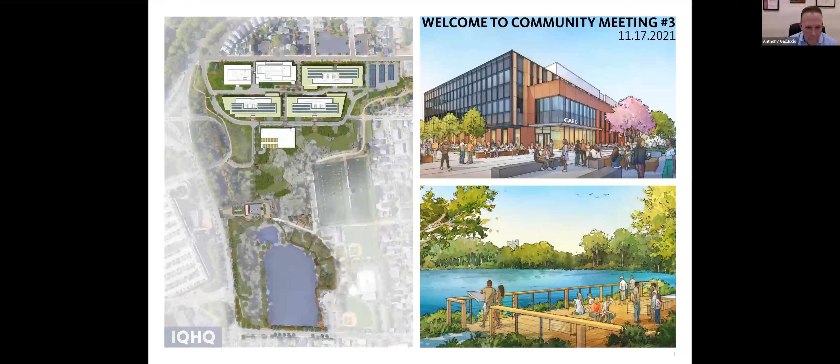This is our agenda for tonight. We're going to go through the different aspects of the Article 19 process, so that when we get to that part of the public process, you folks are in those lanes. I won't read through all of these, but they include zoning conformity, site connectivity, parking, traffic, stormwater, environmental, landscape and trees, sustainability and resiliency.

We also want to give you a sense of the construction timeline. This has probably been the most interactive process I've ever been involved in for a project that wasn't seeking new zoning, and we're going to continue this. So don't worry if there's any site mobilization or moving around - we're going to be communicating with you. Our team has great construction experience and we're all very vested with the neighborhood.

We'll give you a sense of that at the end. The presentation is about 50 minutes. It's comprehensive, but we'll leave about an hour for questions and answers. You can chat, but we're probably not going to grab questions as we go unless we're really fluid - we'll save them for the end and track them. We'd love for you to stay on to hear the answers, but if you have to leave, put your question in the chat and we'll track it and make sure we answer it.

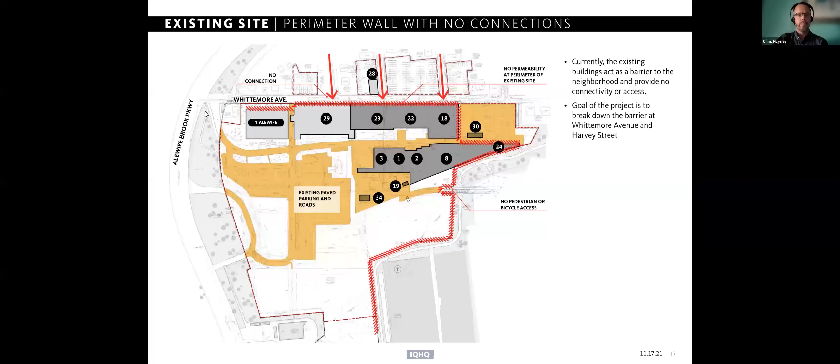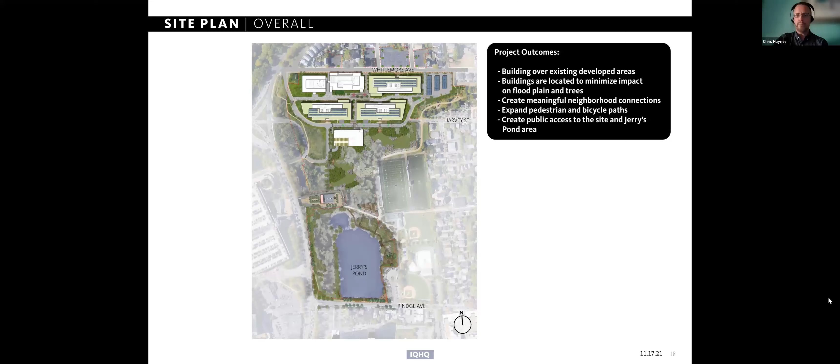This slide includes the overall proposed site plan from Whittemore all the way north to Rindge Ave to the south. This includes the Jerry's Pond Public Access Plan and the development area to the north. On the right side, we've included 5 of the main design principles for the project that were developed based on input specifically from the community.

One by one, the first being building over existing developed areas. You'll see that all of the new buildings, which are in the northern part of the site, are to be developed over existing buildings or existing paved areas. So that's the first design principle.

The second is to locate them in those northern areas to minimize the impact on floodplain, and Howard Moser from VHB will talk a little more in detail about that. In addition, minimize impact on trees.

The third main design principle is create meaningful neighborhood connections. The fourth is expanding pedestrian and bicycle paths. And the last is creating public access to the site and also to the Jerry's Pond area to the south.

The two buildings in the upper left corner are buildings 1 and 2, our existing buildings to remain—they're shown in white on the plan. To the east and south are 3 new proposed buildings, and the smallest footprint building to the south is the proposed parking structure.

All new construction is being proposed under current zoning, as Anthony outlined in the zoning section. New buildings are energy efficient and include biosolar roof installations, and there'll be more on that in the sustainability section.

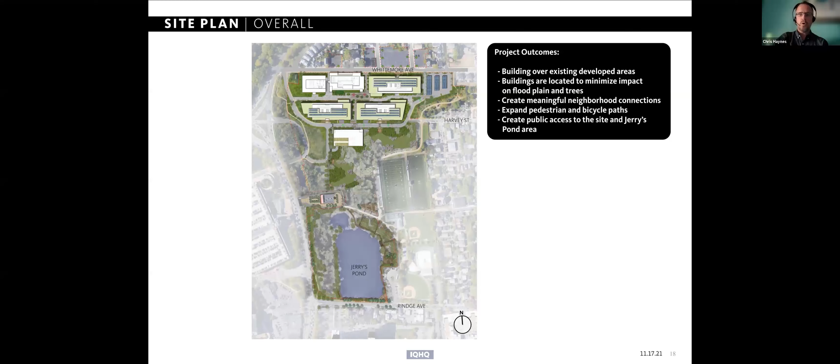The current noise levels were measured and compared against the modeled sound levels from the new buildings, and the new development sound levels will be lower than the current measured noise level—so an overall improvement to the neighborhood.

On the next slide, we'll talk a little bit about the connections that were one of the design principles of the project. There are 6 major connections on this slide that connect the 3 neighborhoods: Whittemore, Harvey Street, and Rindge Ave. These are all really important connections, based on what we heard from the neighborhood groups in previous community meetings. Starting at the top, the Whittemore neighborhood noted 2 main connections.

One is the Whittemore Gateway, in the center of Whittemore Avenue, which links the neighborhood to the north toward the south, to the garage and the MBTA head house and point south. The second, in the upper right corner, is a connection to the Whittemore linear path. The neighborhood noted this was a really important connection. We heard you, and we created that multimodal path, which also includes a new blue bike station for easy access to the linear path.

Next is the Harvey Street connection on the right side. Currently there's no access at Harvey Street, and we heard 2 important points regarding this connection: number one, it should be for pedestrian and bikes only, and number two, there should be no vehicle access.

So no neighborhood cut-throughs—there will only be emergency vehicles at Harvey Street. And then the 4th connection is at the MBTA head house in the center of the drawing.

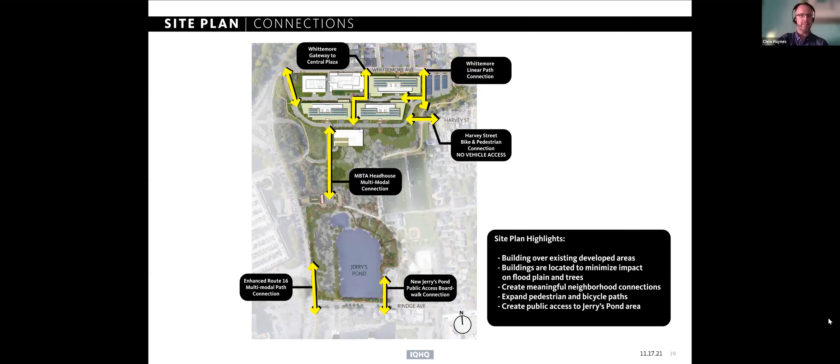So the next slide zooms in a bit on the northern part of the site. Here you see the Whittemore connections to the Central Plaza, as well as the linear path connection on the right side of the plan—bike and pedestrian lanes. These are all publicly accessible connections to and through the site.

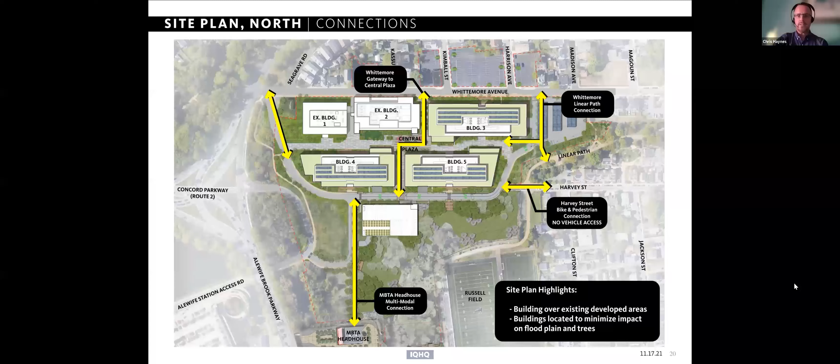You'll also note at the top part of the plan, the Whittemore parking lots are to remain and will be enhanced with trees and other improvements recommended by the neighbors—more on this a little later. So the next slide shows the network of connections and paths through the site.

This was one of the main design principles for the project: expanding bike and pedestrian paths. We heard that from the community early on, to create more space for bikes and pedestrians, and that was critical to the success of the project.

As you can see from this diagram, extensive bike and pedestrian paths have been added to expand the bike and pedestrian accommodations. Community input was vital to provide the most useful and safest connections through the site.

Through the Alewife study group process, specifically with Mike Nakagawa's collaboration, it was integral in helping define a west-to-east path through the site that connects folks with the bike accommodations to the west and the Minuteman path through the site and then to points east.

And this will help alleviate the current congestion that's happening east of the path for those folks who are bike commuting through the site and toward points east.

And then to the south, you can see a robust network of paths in the Jerry's Pond area. Again, there'll be more detail on that in later parts of the presentation.

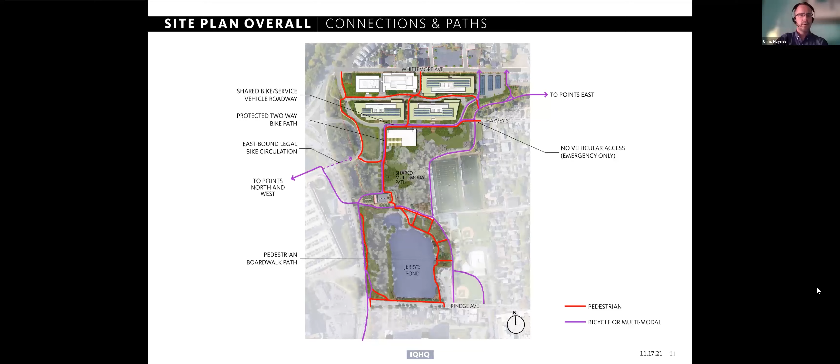So on the next slide, we'll zoom in a bit on the northern part of the site, and I'll draw your attention to a couple of things.

One is the purple line I was just mentioning on the left side. That does connect down south through the site to points east, and again, that will alleviate congestion that we've heard from the community exists east of the head house, by creating this alternate path for through bikes traveling in the west to east direction.

Also just highlight the Whittemore connections, both pedestrian and the multimodal path. In addition, wanted to note that on the west side of the site, you can see a dashed line that goes through the tunnel underneath Route 16.

So we did hear from the community that they were interested in that as potential connectivity. We did do some analysis of that, and based on some dimensional challenges, we're unable to provide two-way dedicated bike and pedestrian access as well as the required dimensions for emergency vehicles such as a fire truck.

But we do know that eastbound legal bike circulation will occur there, and then it can connect into the network of paths created on the site. All right, next slide.

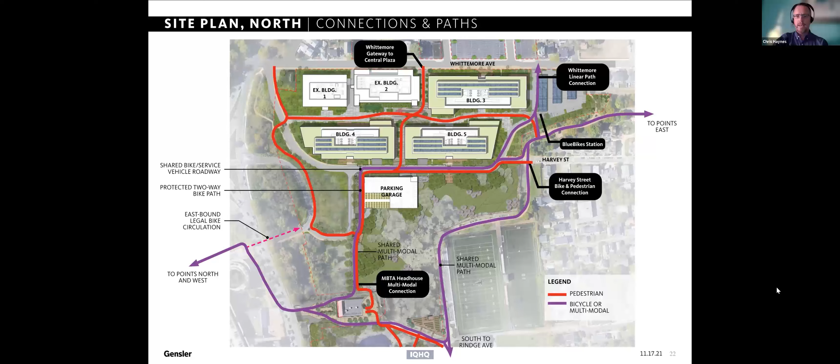So in addition to creating connections, the project is also creating destinations. Based on community feedback and great ideas from folks like David Bass and others, the Central Plaza was designed to accommodate food trucks, lots of seating, a temporary performance area, as well as retail, and all of these areas will be publicly accessible.

To the south, there are overlooks and seating within the habitat areas and Jerry's Pond, and there'll be more on that from the landscape architect.

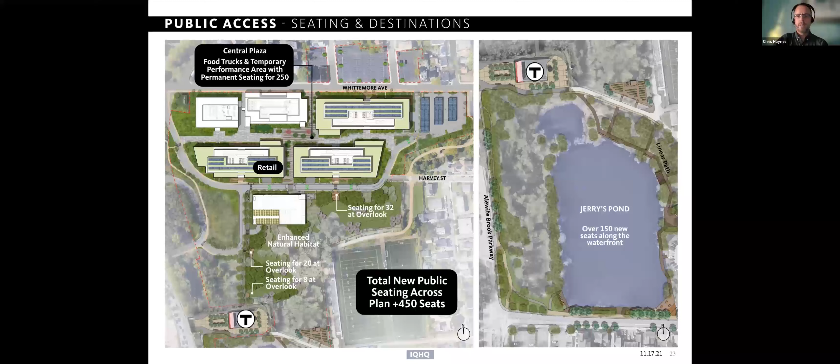So next, we'll do a bit of a walking tour through the site, just to show you a few views of the new buildings and views from around the neighborhood.

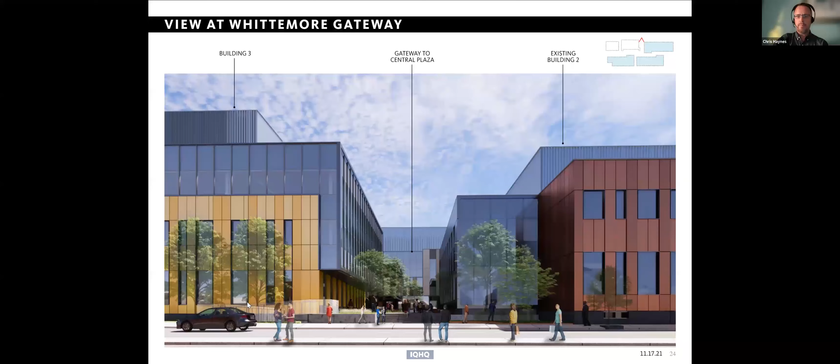So this first one is what we call the Whittemore Gateway. This is looking south from Whittemore. This is the permeability, this is the connection through the site. You'll notice that with the building setbacks, there's space for trees and for a landscape buffer between the neighborhood and buildings.

The next slide is closer to the Harrison Avenue area. Again, you can see the setback allows for a landscape buffer between the buildings. We've scaled the buildings - they are 3-story under the current zoning, as Anthony mentioned - and created massing moves to break down the overall building length.

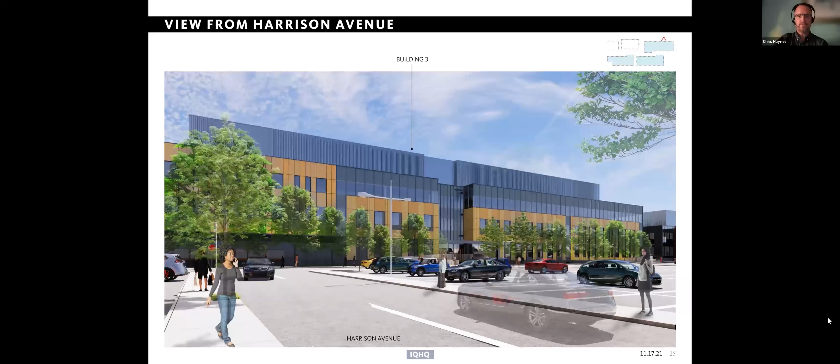In the next view, you'll see the Central Plaza, with activity from the food trucks, and the scale of the buildings as they step down to 3- and 2-story.

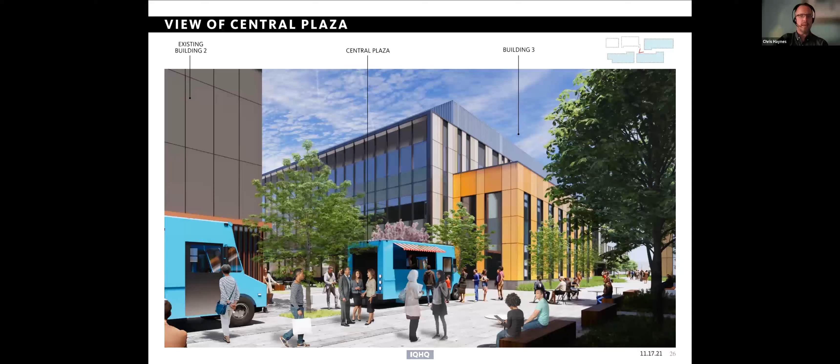In the next slide, this is the shared roadway within the site. It's shared between service vehicles and cyclists - this is not normal vehicular traffic, only service vehicles or emergencies. So it's mostly used by cyclists, with pedestrian sidewalks on the side.

You can see the overlooks on the right side that overlook into the natural habitat area, and in the distance is Harvey Street, just to orient everyone. You can also see the scale of the residential buildings in the background.

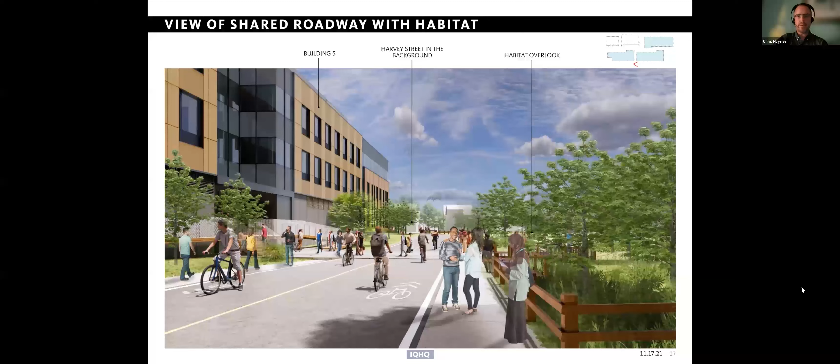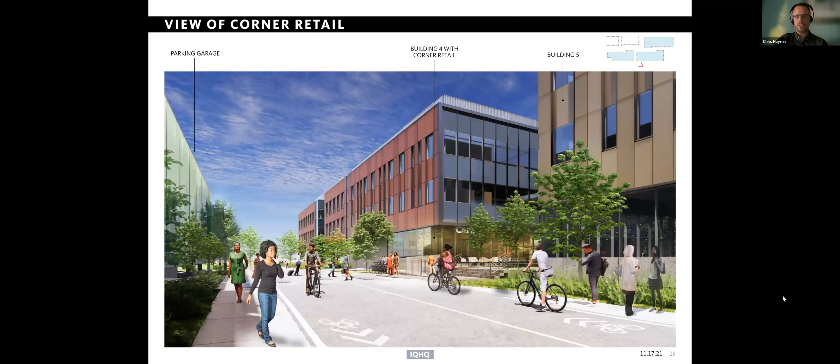In the next slide, you'll see the corner retail, right at the corner of the building in the center. That's the publicly open and accessible retail as an amenity through the site. As you cut through the site to go to the MBTA head house, you can grab a coffee on your commute onto the T. This also shows the shared roadway as well.

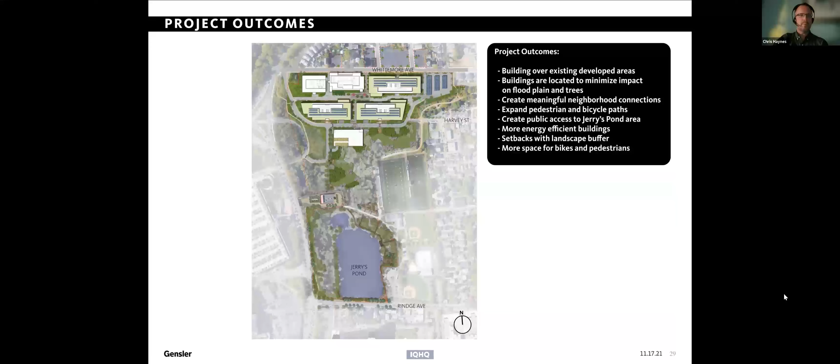The last slide is really just a summary. Based on the valuable community process and input, the proposed project will provide more energy efficient buildings, a reduction in the overall heat island effect, lower sound levels, meaningful neighborhood connections, and more space for bikes and pedestrians. Thank you all for your attention tonight.

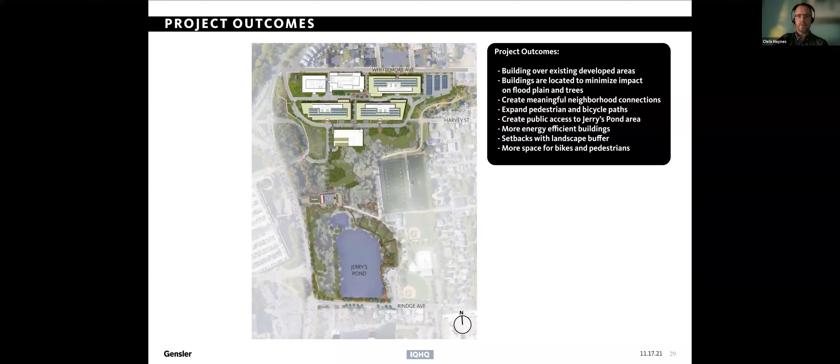It was through discussions with the neighborhood, specifically Nahit, who was very helpful with giving us the perspective of understanding some of the pain points from the neighbors to the north and within that Whittemore area regarding stormwater management and how that negatively impacts their house, and also a request for putting more trees there. So what we're doing in response to that is...

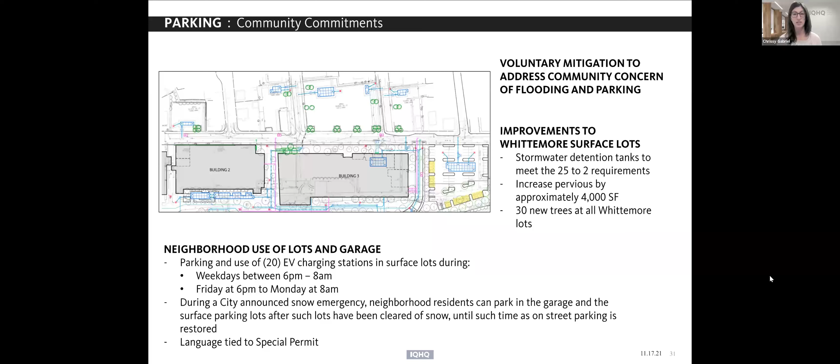Terrific, thank you very much Chrissy, and good evening everybody. Just a few slides to share with you - we can go to the next slide, please. I just wanted to walk through at a high level what we're trying to accomplish from a transportation standpoint. You certainly heard a lot of details just now from Chrissy Gabriel and also Chris Haynes, talking about a lot of the terrific things we want to do on site to really promote sustainable transportation.

This site has a unique ability, because of where it's located, to interconnect neighborhoods and connect them to key regional walking and biking paths, the T, the playing fields, and open space. We're leveraging that as best we can, and that was always our intent early on. Conversations with folks on the line tonight, as well as engaging back and forth with ASG over the past year, have helped the project evolve and become better and better.

Just to elaborate on the points Chrissy made about EV, we want to incorporate it at the level the city wants, which is 25% chargers up front and the ability to have charging stations at all parking spaces in the future. Not only that, but to do it in a way that some are located where the community can make use of them, not hidden in the parking garage. That's a very important provision.

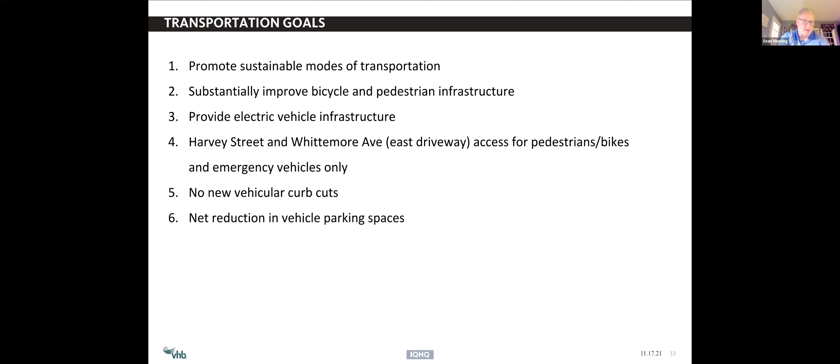And then, of course, parking. This project results in a loss of parking. There are 722 spaces on site today, and we're reducing that count down to 653.

We're doing that through a number of means. Chrissy just walked through what we want to do north of Whittemore in terms of stormwater management and heat island reduction, and frankly just to make those lots look a lot better than they do today—it's all pavement. But we also recognize the community makes use of those parking spaces on weekends and during snow emergencies, and we heard it's very important to maintain those. At the end of the day, we are reducing the parking count because we're going to encourage people to get here by other means—the T, biking, and walking—and we're going to incentivize that.

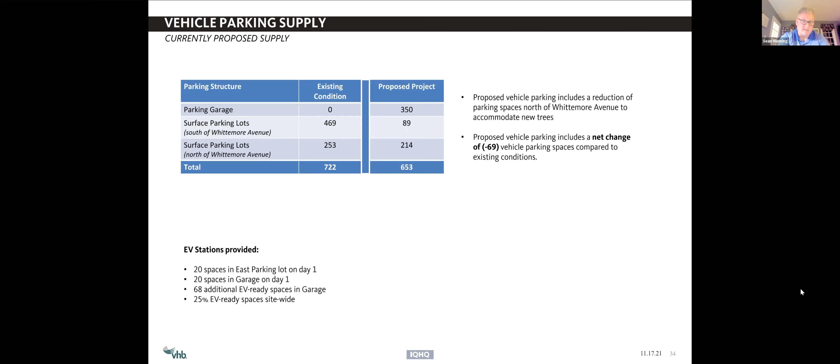Route 2 is an important connection not just to go west, but also north and south, given its connection to 128 just a few miles down the road. Something north of 50% of our traffic will use that route and never be on the Alewife Brook Parkway or on local roads.

Internal to the site, we're going to have gates in all kinds of different places. The whole point of those gates is to eliminate unintended cut-through traffic, whether that's Route 2 traffic trying to get to Whittemore and then over to Mass Ave or other routes. We've strategically put in prox cards to eliminate that.

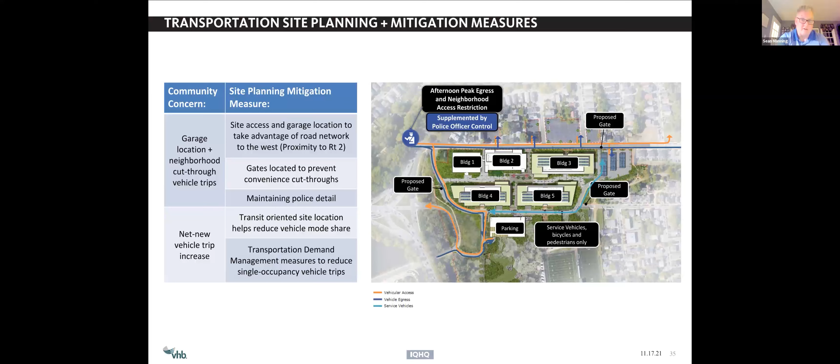First and foremost, to help traffic get out onto Alewife Brook Parkway, which in the afternoon can be a challenging corridor to drive on, but also to get people to respect the cut-through restriction in the afternoon. That is signed, and the Cambridge police do come out on occasion to enforce it, but having a police detail there pretty much every weekday will help alleviate people who don't respect that restriction.

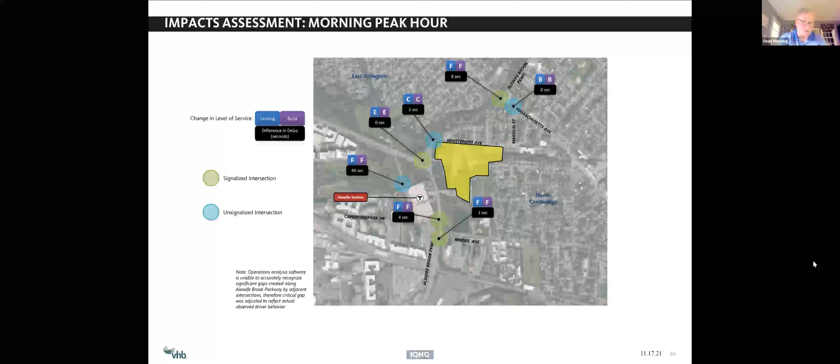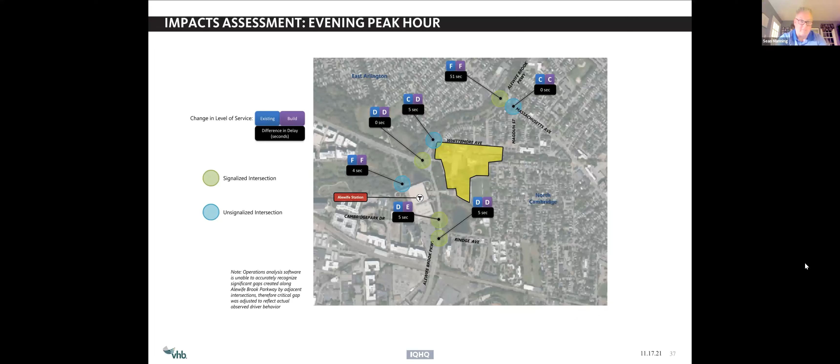It's the same in the afternoon, although I'll highlight Alewife Brook Parkway and Mass Ave, which does not operate terribly well in the afternoon. We're not anticipating a lot of cars going through that intersection, but even a few cars can impact delay to a certain degree, so I want to make note of that. We're also aware that the MBTA and the city have put bus lanes in on Mass Ave. That was done after we completed this traffic study. We know it's a sensitive issue, and that's something we want to talk to TP&T about moving forward, to understand the impact and what makes the most sense long term.

In terms of process, we've conducted a traffic study for the city, with a lot of back and forth with the traffic and parking department. Because this project abuts the Alewife Station access road, which is a state road, we need an access permit and have to go through MEPA. A very similar traffic study was submitted to MEPA recently. We continue to work closely with both the city and the state to understand what our complete mitigation package will be. As an example, the city and community have brought up Comeau Field and the issue of bus turning movements, and with our work on Jerry's Pond, that's something we're committed to addressing. There'll be much more before it's all said and done, and those conversations are ongoing.

Certainly as it relates to TDM, we're very committed to transportation demand management incentives to get people out of cars. Walking through some of those measures, I'd reiterate what you've heard many times - a lot of this has come through not just city feedback and input, but community impact and feedback. Our ASG meetings have been incredibly beneficial in helping us evolve and grow what our project will be from a transportation standpoint and many other perspectives.

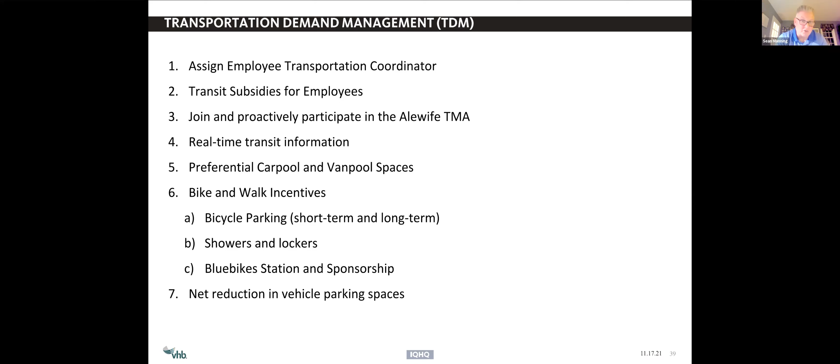And finally, just reiterating the reduction in parking spaces - roughly 10%, about 70 or so spaces being reduced in connection with the project. So thank you, I look forward to your questions. I'm turning it over to my colleague, Howard Mosier, who's going to walk through stormwater and flood storage strategies.

Thank you, Sean. Thank you, everyone. Good evening, my name is Howard Mosier, I'm with VHB. I'm going to talk about stormwater and flood storage and some of the benefits that will result from the project.

Chris Haynes did an excellent job talking about the project's building siting strategy and the goal to locate building components and any necessary access roads and pedestrian circulations over existing pavements and building areas to the extent possible.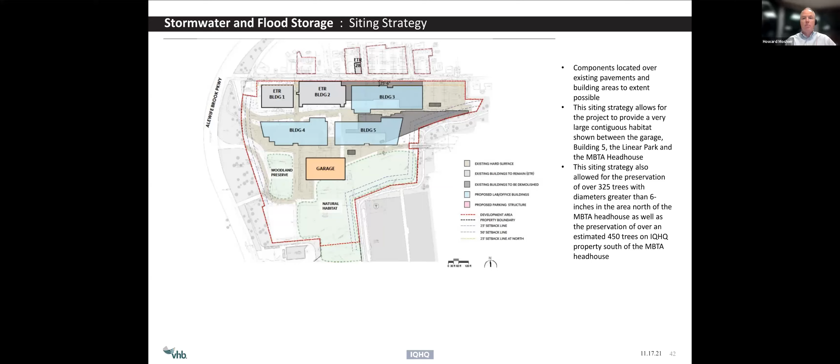This siting strategy allowed for the preservation of over 325 trees within the red boundary. That's in addition to over 450 estimated trees on IQHQ property south of this red boundary, pretty much south of the MBTA head house.

I want to speak for a couple moments about the existing 100-year floodplain. It's located at elevation 18.76 on Cambridge's city datum, and this figure represents the limits of an existing projected 100-year flood event. The different colors represent the different elevations. The low spot elevation is approximately 14, going up to 18.76. In general, FEMA would expect the flood limits to be wherever the color boundaries are shown.

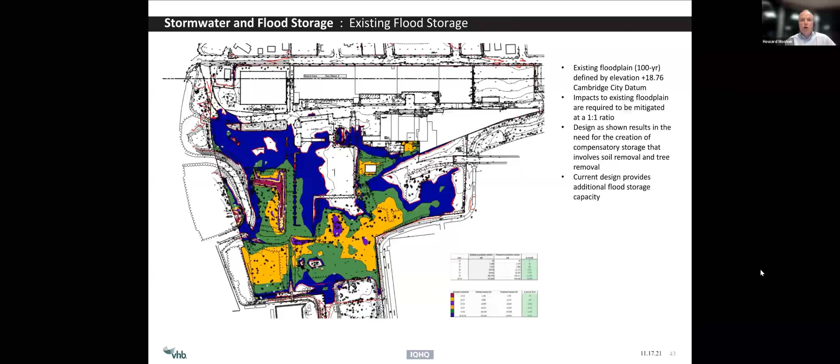What we have to do with our proposed project is address some impacts. We're locating buildings partially within that existing floodplain, along with some roadway improvements and the proposed parking garage. The project is required to mitigate any impact to the existing floodplain. This is a volumetric exercise, and the project will have to provide replacement volume at a 1-to-1 ratio or better.

As depicted in this plan, our project team's been working hard to create that benefit, and we are increasing the floodplain capacity. It's important to note that when we last met as a collective group at a community meeting, this looked a little different. There have been a number of major and minor moves in coordination with community groups, including Mackie Buck, Mike Nakagawa, David Bass, Eric Runenbaum, and Louis Weitzman, with a lot of great questions and suggestions.

This is a very large site for Cambridge, but the garage has been shifted to the west, which provided a benefit. We've also allowed the portions underneath the garage to flood, again creating a benefit.

All said and done, when we get done with this project as proposed, the project is providing approximately just a little bit under 3% additional floodplain capacity than exists under current conditions. So after the project is constructed, the project site will have the ability to hold more floodwaters, thus reducing the impact to the neighborhood. So that's a good thing.

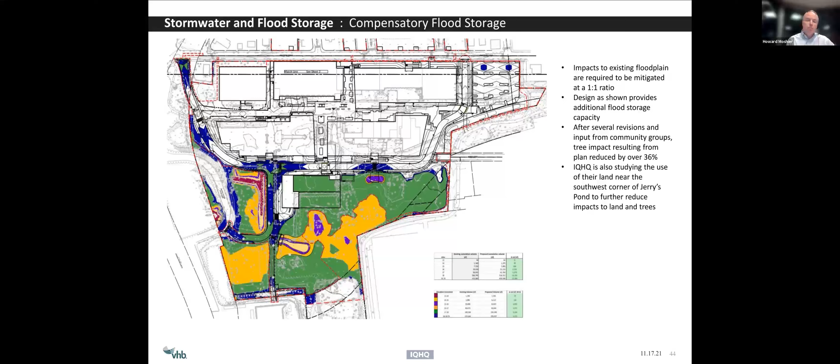As Anthony mentioned, the project team is now considering an area to the southwest of Jerry's Pond. This stretches from Whittemore Avenue at the top all the way down to Rindge Avenue. The area around Jerry's Pond would also flood under existing 100-year floodplain conditions, and we're studying taking advantage of that white area at the lower left corner, where there was an old building and some pavements.

The project team is exploring creating compensatory storage there, which would have two benefits. One is it would remove paved areas that currently prevent rainwater from entering the soil, so those pavements could be removed. Then the floodplain compensatory area would be created there, which would allow the project team to have reduced impacts to trees within the development area. So this is still very much under study.

That study and the initial findings will be presented to the Conservation Commission for their review and consideration.

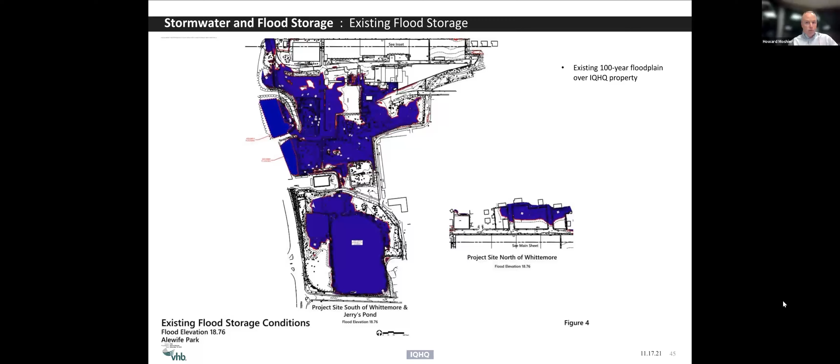This is a summary in terms of flood storage. Under current design, the project would create almost 3% more volume than exists today, which is a benefit for the entire neighborhood.

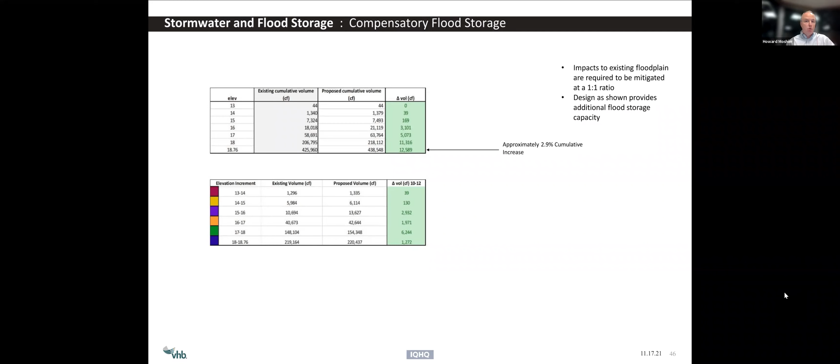Now I want to move quickly to some stormwater rate reductions. Flooding doesn't necessarily have to be associated with rain events, but it often is, and stormwater is associated with rain events. The project has a number of benefits that will contribute to very substantial stormwater rate reductions.

The siting strategy itself reduced impacts, and the project is adding over an acre of permeable area, over 50,000 square feet.

The new buildings will be provided with either green roofs, shown here in green, or purple roofs. Purple roofs take the advantages of a green roof but also supplement it with detention capacity, meaning when rain hits those roofs, it doesn't immediately get into the pipes and take up capacity in the storm drain system, freeing up capacity for the neighborhood systems.

We are retrofitting detention systems below the pavement surface in the lots north of Whittemore, which also provide water quality benefits. South of Whittemore Avenue, sprinkled throughout the development area, the project will include significant amounts of subsurface detention systems. You won't see them on the surface, but below there'll be a lot of volume for stormwater to be held within the site, not releasing at the same time as stormwater makes its way through the pipes below the streets and into the wetlands to the west of the site.

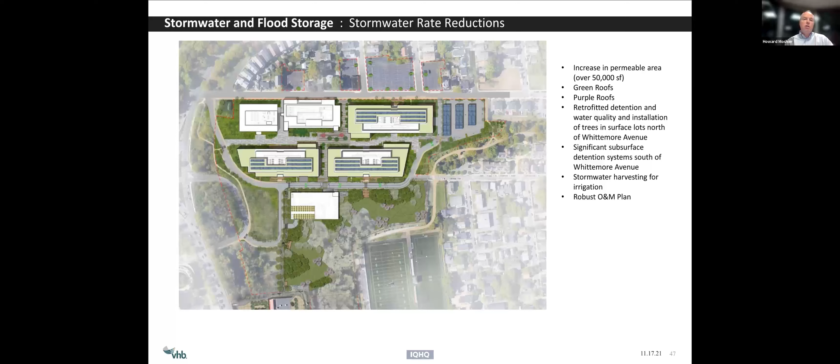We're also proposing stormwater harvesting, so rainwater will be collected in a tank and stored for use in irrigation demands on the rooftop plantings or site plantings. The project will also engage in a robust operations and maintenance plan, ensuring that whatever devices and management techniques are installed will be maintained and monitored to function as well 10 or 20 years down the road as they do today.

This is a very unique site, a very large site for Cambridge standards. In general, stormwater from the IQHQ development area goes to 5 different design points, heading north and west, and includes contributions from Russell Field.

We had to analyze for each design point what we're doing to reduce stormwater, focusing attention on the 25-year column. In a 25-year storm, we analyzed runoff, the rate of stormwater running off the site and into pipes under these different scenarios. The reductions, shown in brackets, add up to approximately 50 CFS.

That's cubic feet per second. It's not a volume most people know, but in terms of equivalence, 50 CFS is equivalent to over 30 million gallons a day, or approximately 2,200 domestic garden hoses discharging simultaneously. It's a tremendous amount of water.

For the neighborhood and receiving waters, this means the closed pipe drainage that currently experiences surcharging in these storm events will no longer have that capacity taken up by this project site. It'll be free for the other neighborhoods, a tremendous amount of benefit there.

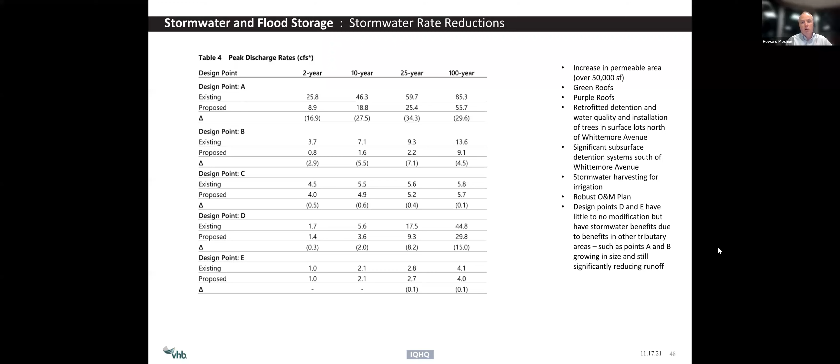At this point, I'd like to turn it over to Jennifer Sweet from Haley and Aldrich. Thanks, Howard.

Hi, I'm Jen Sweet with Haley and Aldrich. I've been involved in this site for a very long time in its current state, and I really never thought I'd see the day where the site would be improved in such a dramatic way. I mean, we're talking about Food Truck Fridays and seeing David Bowie performed as a space opera. I feel like I might have to go do my AUL inspections every Friday now. But as an LSP, I couldn't be happier that IQHQ is leading this project, because they have really made it a priority to focus on environmental responsibility and community engagement, and that makes my job a whole lot easier.

Some of the questions we've heard from the community through this process are: what about the contamination, and have you tested?

This site has gotten a lot of attention given its history of industrial use dating back to the early 1900s, when Dewey and Almy Chemical Company operated here. There's been extensive chemical testing in the past with over 600 explorations, and the presence of contamination consistent with the former use is not unusual for sites with former industrial uses like this.

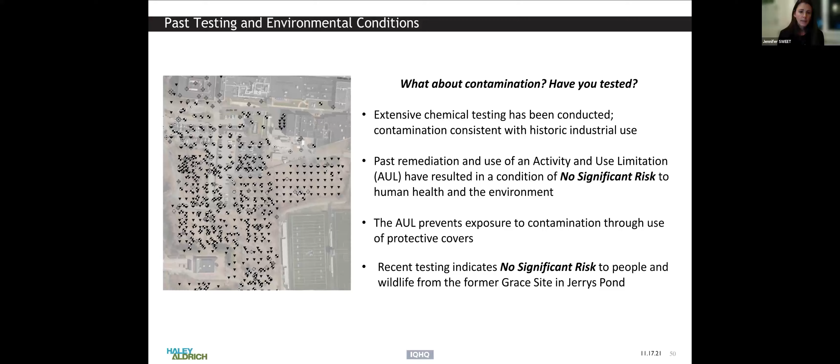Another question we've heard is, how is this project going to be constructed safely given the contamination? Going back to previous testing at the site, there were concerns about asbestos in soil. The Alewife Study Group formed around 1995, and through much of their efforts, the city created and adopted an asbestos protection ordinance.

The ordinance ensures protective measures are in place for soil disturbing work at sites that contain asbestos. IQHQ has committed to working within this ordinance, including the use of tents when working with soil that contains asbestos. As previously mentioned, protective covers are effective at preventing exposure to contaminants, and the underlying soil containing asbestos does not pose risk when left alone. That's why one of the overarching goals of the project has been to minimize soil disruption to the extent possible.

But let's be realistic—there's going to be a need to disturb soil in order to redevelop the site, and frankly the result will be a much better environmental condition at the end of the project. So what will be done to manage contaminated soil that does require disturbance? There will be multiple protective measures in place as prescribed in several work plans being developed, which also get reviewed and approved by local and state regulatory agencies.

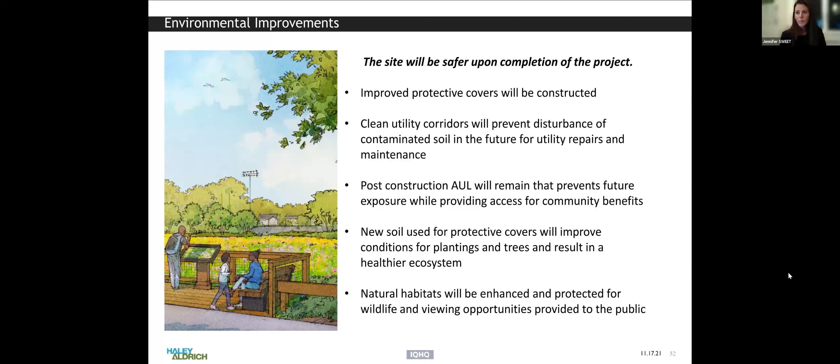I hope we haven't lost many of you, because JP is up next, and I think you're really going to enjoy his part of the talk. He gets all the exciting stuff. I get all the boring contamination stuff, and JP gets to go on about all the improvements. So stay tuned.

Oh boy. Thanks, Jen. Set me up there.

Hi, I'm JP Shadley. I'm a landscape architect. I'm really lucky because I get to tell you all about a ton of cool stuff that we're going to do here. Thanks for sticking with us. This is a very complicated, big site with all kinds of really critical things to teach ourselves and each other, and for us to talk about with you guys. It takes a long time to talk about it, so help me muddle through, please. Can we go to the first slide?

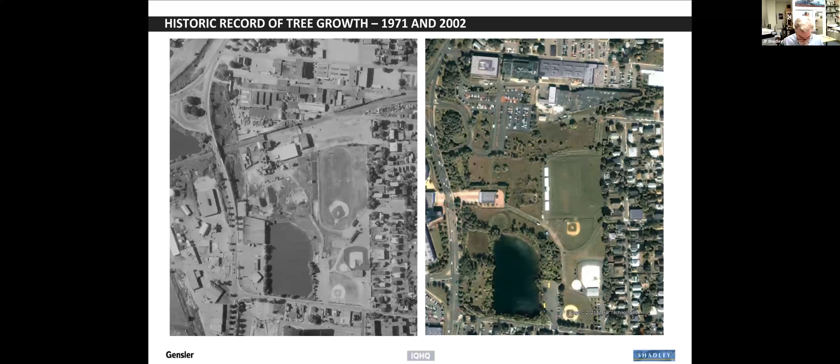So can we go to the next slide, please? This is a big site.

Working on a balance here. It's incredible. I feel really lucky there's such a dedicated community—working with Joel Nogic, Lisa Burke, and Eric Grunebaum, and partnering with ASG and Friends of Jerry's Pond, as well as Mass Audubon and Green Cambridge. They have improved the project so much, it's incredible. To give you a sense of scale: if you start at the top of our project and walk to the south, go right through the heart of our pedestrian crossroads, walk around the garage and down past the MBTA head house, then walk a loop around Jerry's Pond, and head back home the same way you came, you will have walked a mile, a little over a mile.

It's a big site, so it's really interesting that this incredible transformation is going to take place in such a large area. There's this legacy of natural public open space, and there's going to be real environmental and social consequence that happens here. I'm going to keep reading my notes so I don't miss too much. There are 3 areas that I'll focus on, and each is very different—again, it's a big place. There's the central walking plaza that runs between our 5 buildings—that's 1,000 feet long, that spine that goes between there—and we're doing a lot of cool things there. Then there's the area south of the garage and north of the head house that's got a panhandle shape to it—that's just over 4 acres of natural area that we're going to supplement and really improve upon its ecology. And the 3rd area I'll focus on is Jerry's Pond, and we're going to talk about some of the things we're trying to do around there, and with your help, we'll be able to do. So can we go to the next slide?

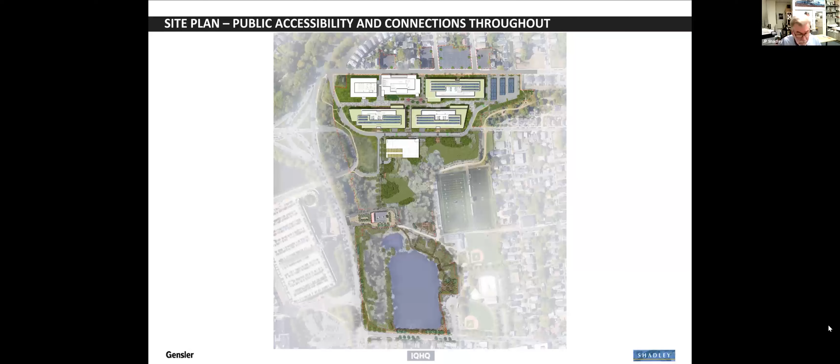First of all, there's over 150 really cool benches. The pavement is really interesting. The planting's really nice. There's a place to get food, coffee, and lots and lots of seating. There's the food trucks. Through all of our furniture choices and the surfaces and materials we're using, everything will be fully accessible, so if a person happens to have a handicap, they're still going to be able to easily get through the entire site.

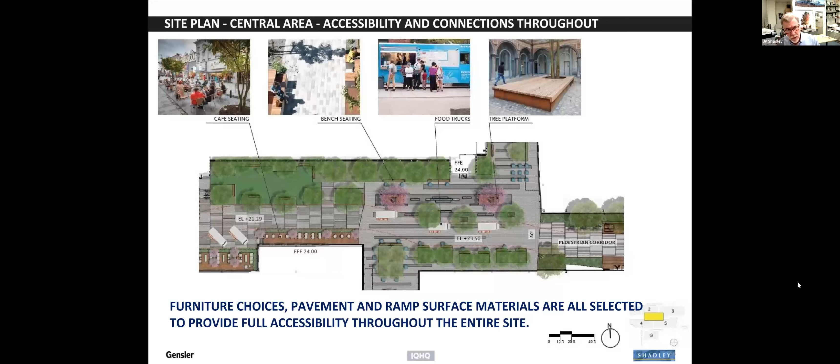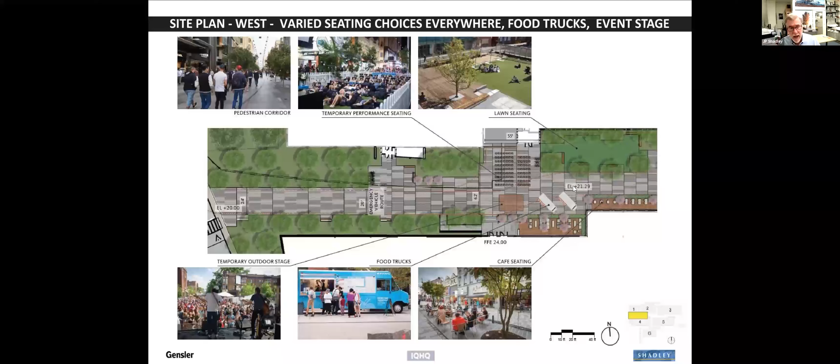Let's do the next slide. I'm going to keep going really fast, sorry about that folks, but there's so much to cover. It's really a beautiful landscape as well.

There's porous pavers everywhere, as Howard said. There's state-of-the-art tree well details and really good lighting. Overall, it's just a quality landscape experience, a plaza that will add to the public realm in the area that people will be free to come and participate in.

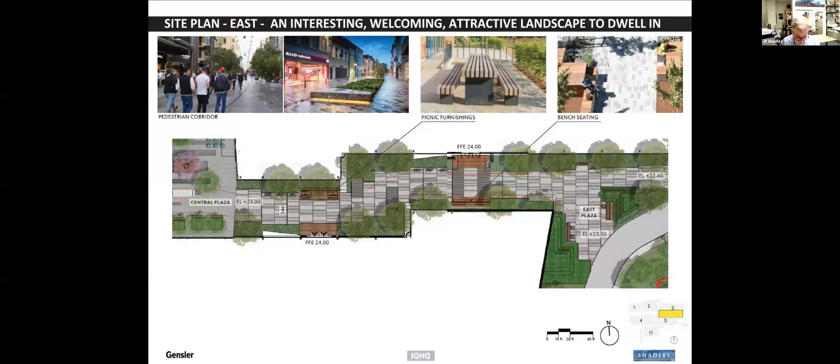Okay, can we go to the second area I'm going to talk about, which is the 4-acre wildlife habitat? Again, if I'm not giving enough detail, this is our 3rd presentation, and we've covered a lot of these things in greater detail, but I'm going to try to cover things real well.

This area is, I guess one of the most important things we're doing is leaving a lot of it alone. Howard refers to how much flood storage we're doing on the site, and it's really an incredible accomplishment to reduce the flooding that'll happen in the neighborhood. But at first, before we worked as hard as we have with the community, and I will tell you, Mike Nakagawa has beat the heck out of me on several occasions.

It was really a struggle, to be able to do that flood storage and create this open space without taking out as many trees. Through our efforts, we've reduced the number of trees impacted since our first effort by over 80 trees.

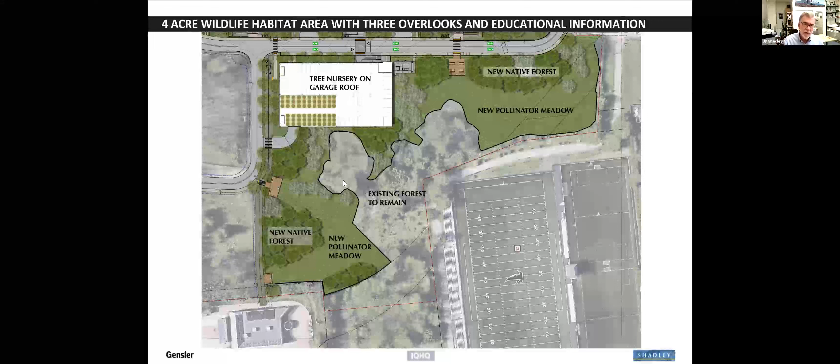So can I go to the next slide, please? Oops, can we just back up for 1 second? If you take that cursor and move about an inch or 2 to the right, just straight right, yeah, right about there. The next shot is a photo from there of the existing condition. Can you take that to the next slide now?

So if you're standing looking at the existing condition, that area we're looking at doing this 4-acre natural area is comprised of about 75% of only 2 species of trees, and that's black locust and cottonwood. And while they both really help with mitigation for the heat sink...

The cottonwood are not really that great from the point of view of habitat. I mean, they have some foraging value, but black locusts are really good trees in terms of what they do for pollinators and butterflies. But on the other hand, a forest with that kind of concentration of makeup is really vulnerable to diseases. Most of us have heard about chestnut blight and Dutch elm disease, and more recently, emerald ash borer. These are things that just decimate a forest.

So it's possible that if something like that happened and we didn't help to expand the range of species in this area, we could lose half of this forest in just a year or 2. That's how dynamic some of these pests are. So can we go to the next slide, please?

So if we get that wide variety of proposed new trees, it'll enhance the wildlife value a great amount. Things like beeches and oaks and cherries, cedars, white pine, they all feed a really wide variety of animals and plants, birds, of course. This is an avian byway. But they also reduce the forest vulnerability to disease.

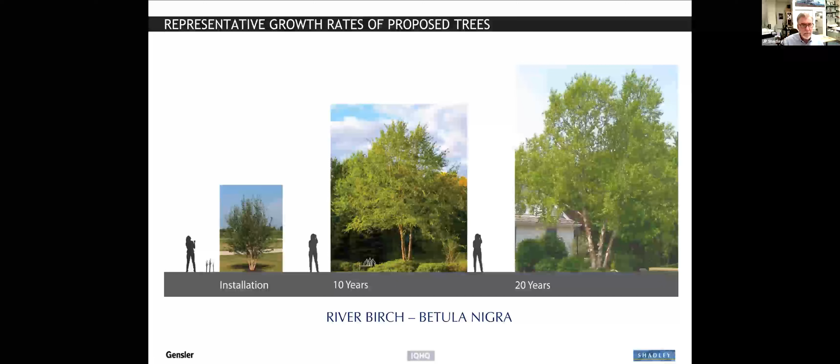Okay, so now we're at 7:52 and I want to keep flying. Hopefully you guys are following it and I'm not overlooking too many things, but we're going to talk about Jerry's Pond, which a lot of people are really most interested in. It's incredible the help we've got from Rachel DeLucas, Lou Weitzman, Eric Grunebaum, and Anusha—young people have been really interested in this and made contributions to the project.

So I'm going to spend a lot of time working from the upper left in a circuit. I'm going to first show it to you in plan and then show it to you in a perspective. So that's the MBTA station.

If we go around clockwise, the next thing you come to is the communal gardens. Then we have a boardwalk with lots of access to it. We're protecting that part of the forest. Someone's been asking lately about fencing—yes, we have to protect that part of the forest for habitat, but we've got beautiful boardwalks with railings, 42 inches tall, that are highly transparent, but keep people off of that area.

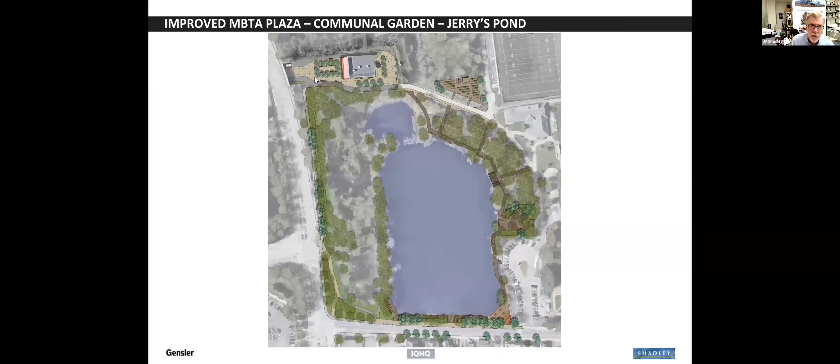But what's very important is that there was a heron rookery, and hopefully it'll be back. There's a very large area here on the left side of the entire image that's forest that we do not want to disturb.

So as we go from the lower left corner, where we've got this new multi-use bicycle and pedestrian trail that gets you away from that loud intersection, and then head north up the left side of the site, we've threaded this circuitous, purposeful, slow pedestrian path through the trees. And that's so that you can separate.

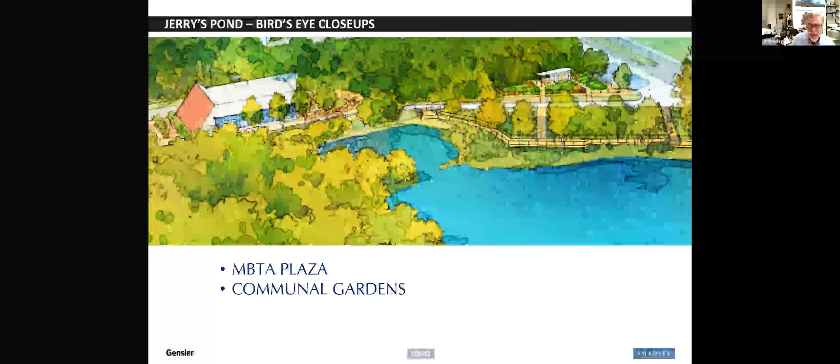So this aerial view shows a really comprehensive refurbishment of the bike paths, of the circulation. We're working to improve the safety and also make it a fun space. We've got these really cool planters that Matt thought up, and the community has been working with us to enliven what's really now an awful space. Take away the trailers, put a really cool mural on the side of it, so that when you come from our project development area, you feel like, wow, I'm coming to something cool. There's a community aspect to this.

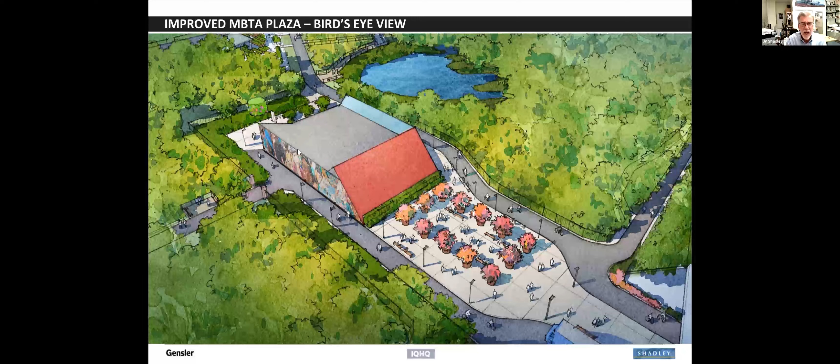And then the communal garden is one of my favorite things. We're working with Green Cambridge and their team to provide really great services for this. I've got to keep going fast, folks, so I can answer questions about how this all works. I went into great depth on that last time we talked about it, but they've got a great management strategy. They give away any extra food they have. It's really a terrific program. So let's go to the next.

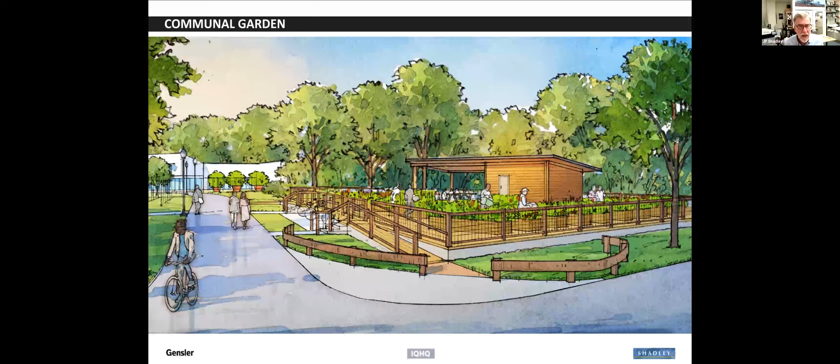Two of one of my favorite pieces of the project are the Eco Center and Jerry's Deck, and they're located just to the north of the bus turnaround, to the left of that in this image, and they're really consequential pieces of the project.

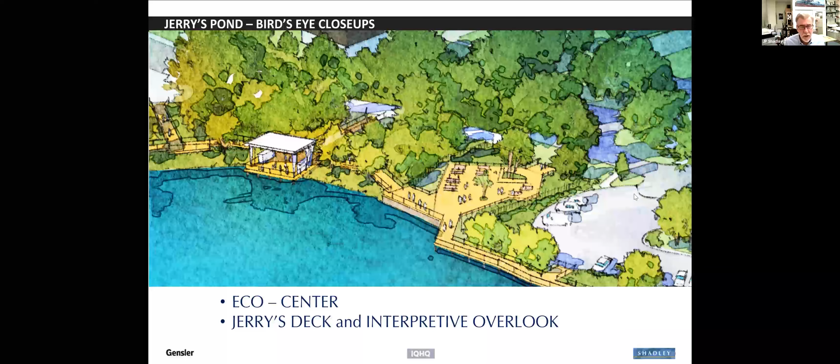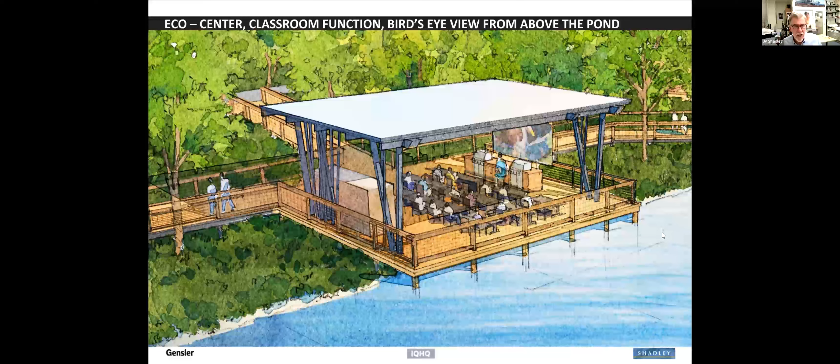So the first image I'm showing you is from a bird's eye view from above the pond, looking at the Eco Center. We've been working with the folks at Audubon quite a bit on this, and they've been incredibly helpful, partnering with us. This view shows how it reaches right out over the water. It's a classroom. We have folding tables and chairs for the classes, stored in the box you see there, as is the audio visual equipment. There's a pull down screen. So it'll truly be an outdoor classroom where we're going to be able to do experiments there, and Audubon is going to manage this program.

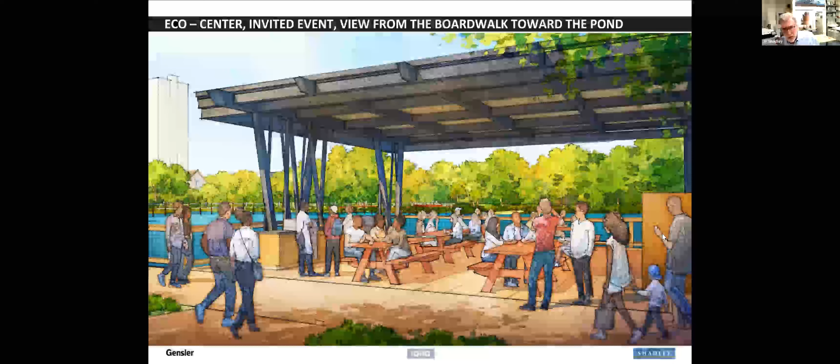On the other side of it, the community has done a terrific job pressing us on getting multiple uses out of things. And Anusha, God bless her, pressed and pressed for these grilling stations. So you're going to be able to sign up for a time when you can have a community event that's invited, and you have to sign up for it and have permission, but picnics can be held here, or classes, etc. That's another use that's very exciting about the space.

The reason I want to show this is because I want to show how Jerry's Deck is separated from the Eco Center. I almost forgot to mention we started on that southwest corner, which I'll come back to. We located the Eco Center here because it's quieter than on the corner of Alewife Brook and Rindge Avenue. It's going to be a lot better place to actually learn about nature and be immersed in nature. But it's proximate to, you can just see the bottom of the foundation on the right side of this image, where the old bathhouse used to be.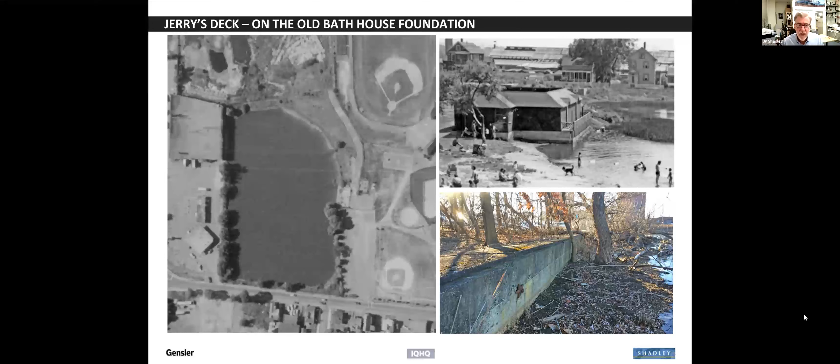And so if we work really carefully, we're going to be able to save a significant number of trees. Next slide. So this is a view, believe it or not, from basically at the tot lot, at the entrance to the tot lot right now, looking across the linear path, and towards where the Eco Center is, but across Jerry's Deck.

And so we have all these trees surveyed, and I've done a visual inventory of them. That tree on the right is realistic - it's a huge oak tree that we're going to save. And the other tree to the left in the middle, those 3 that are together, I put that boardwalk above and around them so that people could walk right by them, and we can tell the story of how we've saved those trees. It's a large area.

There's going to be picnic tables on it, and about 60 bench seats are in this area. As you go to the left side of it, you can see it's right on the waterfront. This was Lou's favorite space, Lou Weitzman's favorite space, and he pressed us on this - damn it, it's really cool. So I really hope we get to build this.

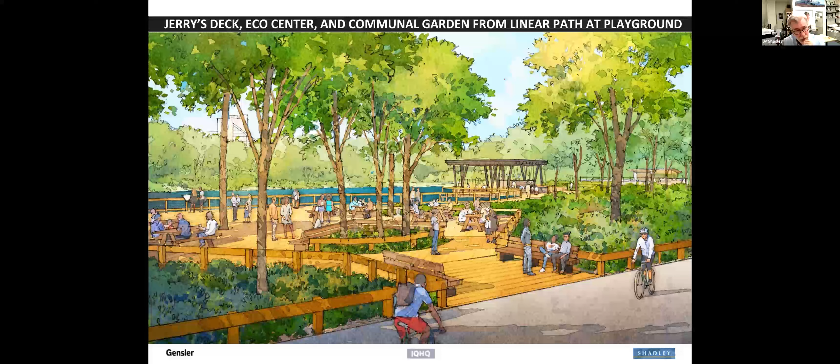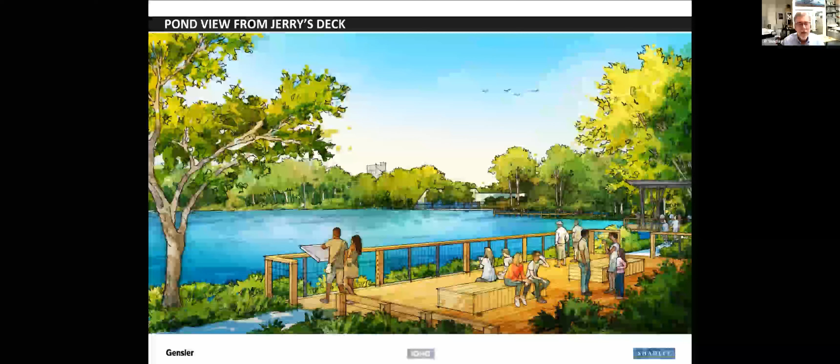The next slide is just a close-up of the edge, as you move from the last slide closer to the water, and it shows how some of the interpretive markers are there. We really don't want to impede the direct contact with the water.

Right now, at least the first time I went there about 10 months ago, when you look directly across the water here, I saw 9 herons from that vantage point. We're really hopeful that that's going to happen again. So next, please.

So back to the big picture, just so you can see how far we've come. Now we're going to loop around to the right and come past that entry plaza with an overlook. I'm going to blow this up for you on the next slide. Again, we're going to go down the 300-foot long waterfront pedestrian boardwalk, and then end on this community outdoor overlook with 24 bench seating. So let's blow this up, please.

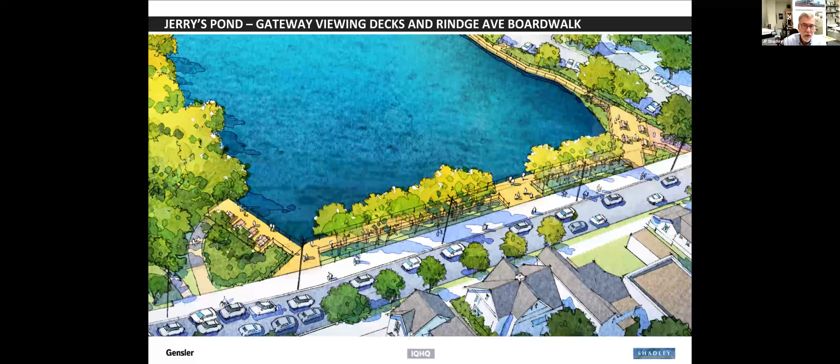So the strategy here was that we're adding a bike lane to a multi-use path. We're widening the sidewalk, and then we're going to create a planted area where we add 30 or so more trees to those existing, but then we push this boardwalk out so that you're away from the edge of Rindge Avenue. It's a nice, broad, 10-foot wide boardwalk with beautiful views and immediate contact with the pond. Let's do the next slide.

So this is what it looks like. You're away from Rindge Ave. There's new trees and old trees on your right side, creating a buffer. The bicycles are going on the far right side. And this is a pedestrian space where you can walk with your kid, take some time, maybe sit there and read a book.

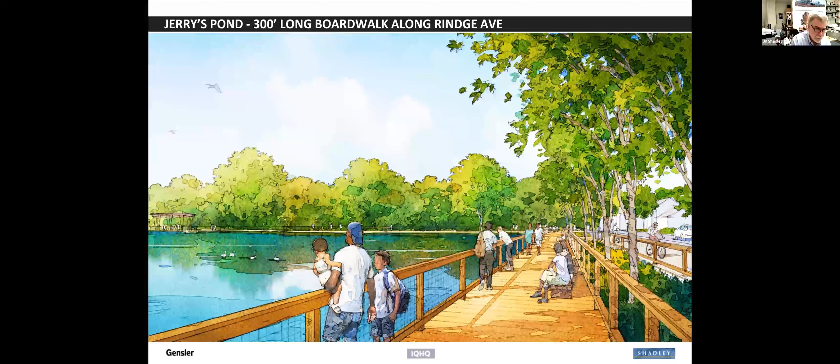It's 300 feet long - a pretty significant improvement. Next, this is my last detailed slide, which shows, again, you're looking back - that's the Eco Center over the shoulder of the woman with the backpack in the middle. It's another place where you can just rest and look at the beauty of the site.

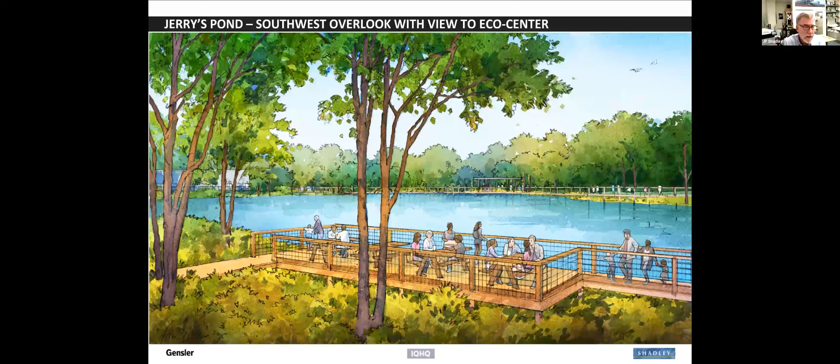And then let's just go to the last slide. So this is the overview. We were just looking at that community outdoor overlook, and there we are. Thanks for your patience, everybody.

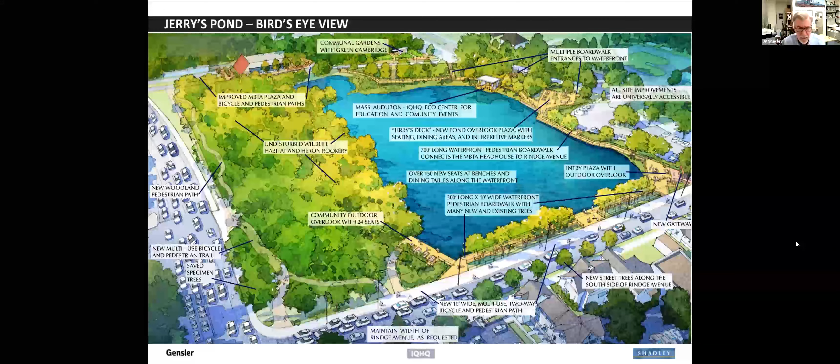I'm the Sustainable Design Consultant for the development. I know we've already thrown a lot at you, but don't worry, you only gave me a couple minutes. We recognize that being efficient with time is important too. I'm lucky on this project since the team identified sustainability as an important goal early on and recognizes that's a shared priority of the community. Since sustainable design is intrinsically a collaborative effort, you've already heard from my colleagues about many exciting elements already included in the design, but I wanted to highlight a few others.

Some of the primary goals for the team included a focus on energy efficiency, where new high performance buildings will replace inefficient ones, designed to exceed the aggressive energy code. Buildings that remain will see an enhanced renovation where IQHQ went above and beyond to commit to more efficient rehabilitation to improve overall energy efficiency.

Going beyond just operational carbon - what happens with the operation of the building - the team is also focused on embodied carbon, through strategies like strategic reuse of structures where possible, and conducting assessments to evaluate the environmental impact of products and materials used on site, selecting those that reduce embodied carbon and other environmental impacts.

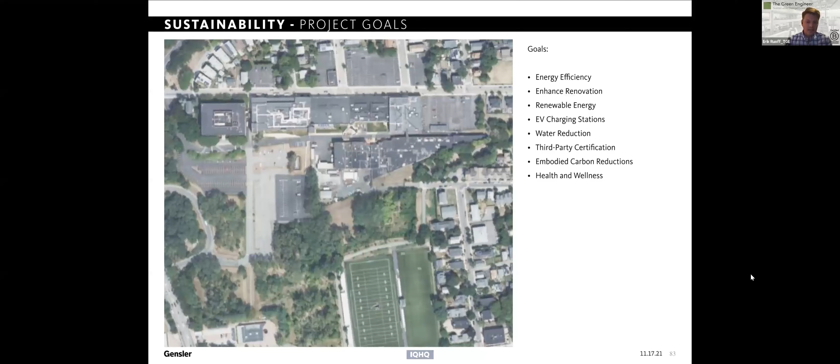So as we transition to this next slide, pay attention to the before and after. There we go - gone are the inefficient buildings and the sea of blacktop, replaced by a sensitive design that revitalizes and reinvigorates the site, which is open to the neighborhood and provides significant open space, places for activity and respite, and addresses heat island impacts through a variety of strategies. We're proud of how this is all coming together and think it's going to result in dramatic improvement.

So there's a lot going on though. Let's start up top. Next slide, please.

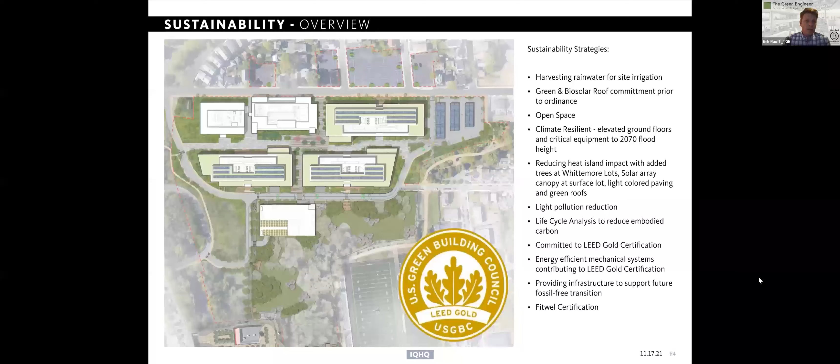An element we wanted to highlight is the team's commitment to green roofs in the design, a priority even before the new green roof ordinance took effect. The design will include multiple green roof solutions. First, traditional extensive green roof areas will be included on the low roofs of the new construction buildings.

But going beyond that, on the upper roof areas, biosolar is being proposed. This is new to the US market - a combination of green roofs and PV panels. The combination allows for more efficient operation of the PV panels given the lower ambient temperature provided by the green roof areas. This biosolar, and a more traditional PV canopy system as shown on the parking lot on the right, will roughly offset the annual electricity production used in 50 average homes per year.

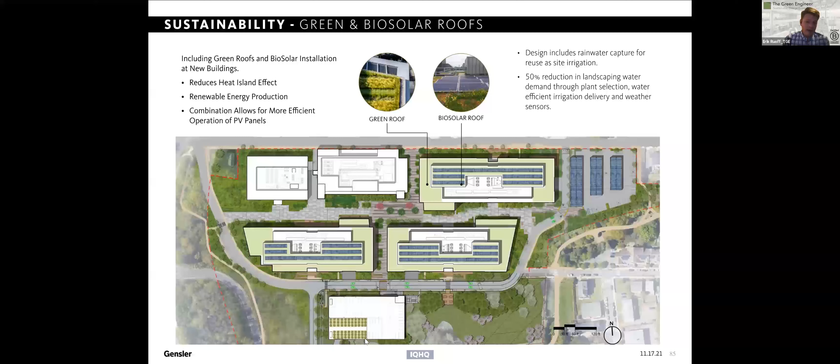Separately, if you let your eyes go south on the plan here, you'll see that structured garage and the tree nursery mentioned by others. The trees grown here are part of the city's backyard planting program, so they'll be planted throughout Cambridge, with hundreds of saplings produced throughout the year.

Okay, so now that we've talked about what's happening up top, let's head to the ground. This slide's also a good representation of some of the strategies that will decrease heat island effect. In particular, you'll notice the light colored pavers in the central plaza and throughout the pedestrian oriented hardscapes.

Additionally, though not shown here, the team is working with the city to pilot light colored pavement surface treatments on the existing north lots, to further reduce heat island impacts. These strategies will, in aggregate, help reduce stormwater, provide more natural habitat, while again reducing heat island impact. There's a lot of cool stuff going on that you can't see here too, and Howard gave a great summary of the significant stormwater system.

Beyond that, we are capturing water that will be treated and reused to irrigate all those beautiful plantings that JP just introduced you to. So this system will significantly reduce the potable water used on site for irrigation.

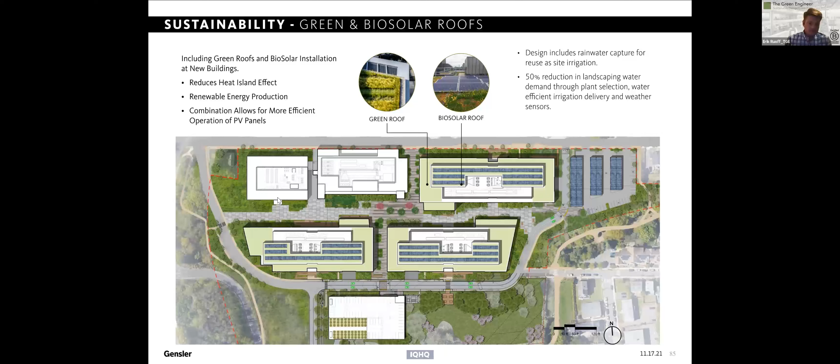As a way to demonstrate the commitment to sustainable design, the project is pursuing third-party green building and health and wellness standards. Pursuing certification provides confirmation that we're walking the talk. I can tell you I'm on a diet, but I can only prove it if I stand on a scale. So as proof of verification, all five buildings on campus are pursuing LEED Core and Shell version 4 certification. LEED is a well-established holistic green building system that focuses on site, water, energy, indoor environment, but has a primary focus on energy efficiency.

That's a shared priority for the team, the city of Cambridge, and frankly needed for our children and grandchildren. So all buildings are committed to achieving LEED Gold certification, one of the highest levels of certification.

Beyond LEED, the new construction projects are pursuing the Fitwel Health and Wellness certification. This is a relatively new certification that focuses on promoting health and wellness within the design and operation of the building. Some of the strategies include enhanced site design elements you've already heard about, but also bike infrastructure elements. It's really about activating the site and activating the people within that site.

So there are active design elements within the building as well, like promotion of stair use and providing exercise opportunities. All this is really to support employees, and will include other amenity areas like mother's rooms and access to water. All this is brought together by health and wellness operation policies that will reduce impact while promoting well-being. All new buildings on campus will be pursuing Fitwel certification, but elements are found throughout campus.

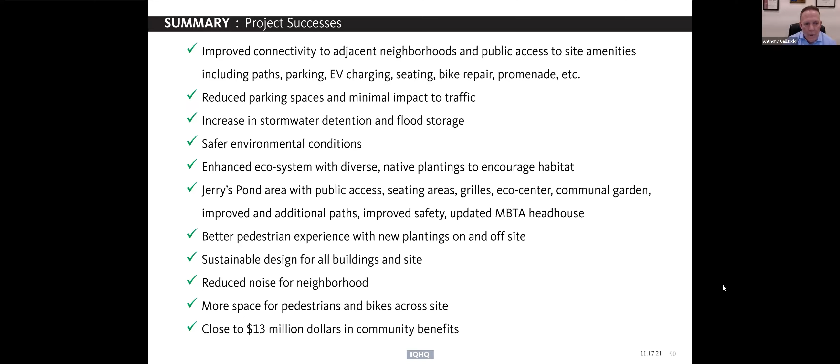And obviously I talked about the community benefits. The next slide is kind of cool because Anusha went out and did a survey in the towers and hit us with all this on opening night. Honestly, a lot of it we thought was out of reach, and we've been plugging away at it. When it's all said and done, all the things folks wanted, whether seating areas, picnic areas, grilling areas, picnic tables, I think we started with like 30 seats at Jerry's and now we're up to about 110. We just kept moving closer to the Friends of Jerry's Pond plan and also incorporating new input from the community.

The only two items we haven't been able to get to are winter skating on the pond. Joel and I are still working on whether we can figure that out. I've always wanted that on the Cambridge Common. If I run for office again, I'm getting that done. The last one we're kind of getting to anyway, since we'll have access during different seasons. I think we could probably connect some retail capacity if there's need for certain things, but I don't want to put Food Town out of business either.